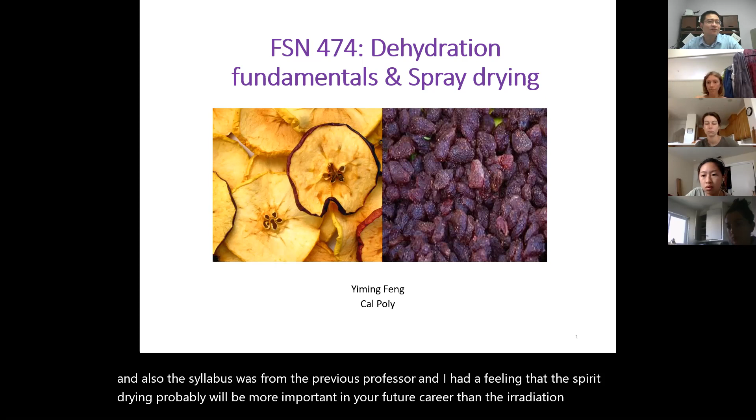So for this class, if you look at the previous syllabus, it was irradiation, but later on I decided to replace it with spray drying with some dehydration fundamentals, because we will have a spray drying experiment in 2 weeks, and there was no lecture covering that topic. Also, the syllabus was from the previous professor, and I had a feeling that spray drying probably will be more important in your future career than irradiation, because a lot of nutraceuticals, vitamins, and food ingredients are actually produced by spray drying quite a lot. For irradiation, it's very less likely that you will have to deal with it, so I think compared to spray drying it's less important. That's why I decided to talk about spray drying today, and I'll squeeze irradiation with microwave into the next lecture.

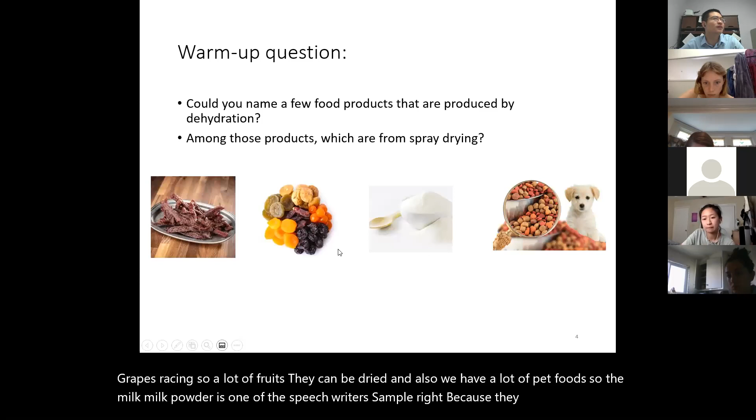So I also listed a few examples here, like beef jerkies, and dried fruits like apples, grapes, raisins - a lot of fruits can be dried. And we also have a lot of pet foods. Milk powder is one of the spray dried samples, because they form a powder structure. So quite a lot of food products in the market right now are produced by drying.

Okay, so this is a review. I assume you guys have learned all of this in 204 and 330, so this is just a review to recall memory. I'll go a little bit fast here, so if you want me to slow down, or if any part hasn't been covered in previous courses, I'll stop and explain a bit.

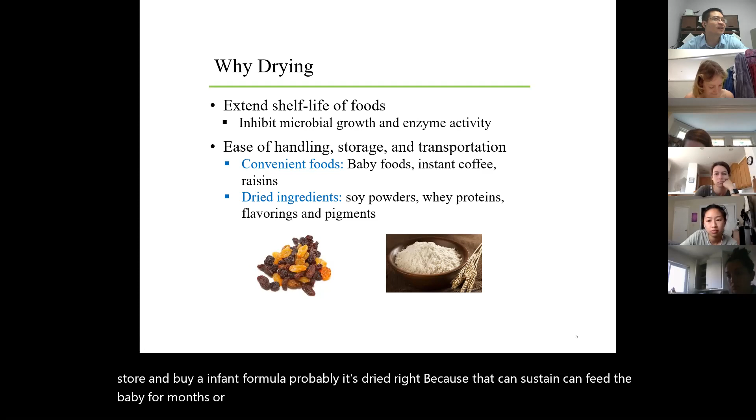So the reason we want to dry our food product is to extend the shelf life, right? Because from the standpoint of handling, storage, and transportation, dried food is more convenient to transport. For example, if you go to the grocery store and buy infant formula, probably it's dried, because that can feed the baby for months or even longer. But if you buy liquid infant formula, that probably can only last for a week or so. So dried foods definitely help us transport food products more conveniently.

And also, a lot of ingredients are dried. For example, a lot of flavor ingredients like spices are dried because we use them in small amounts, and also because if they are not dried, they probably cannot last for a long time. So those are a lot of the reasons we want to dry food ingredients or food products.

So probably you guys are very familiar with this curve, right? This curve keeps popping out again. Basically, water activity is the key factor that influences all those chemical reactions like lipid oxidation, non-enzymatic browning, hydrolytic reactions - enzymatic or sometimes chemical hydrolysis - and also enzymatic activity and microbial growth.

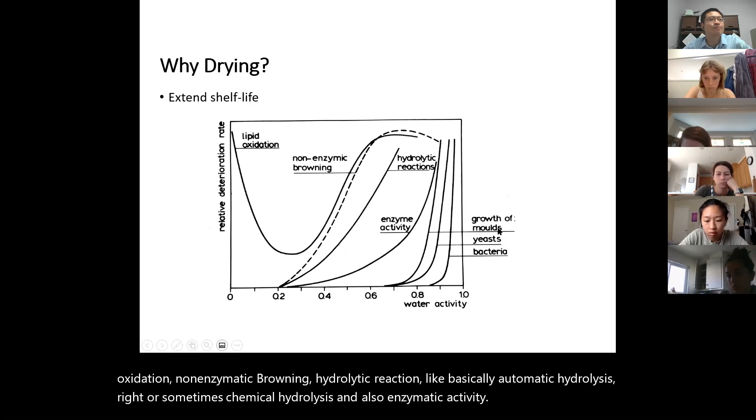When I was studying food chemistry, one of the questions I always get asked is, if we dry food, why do we keep it around 0.2 water activity? If we go to 0, then lipid oxidation is going to be very rapid, right? I don't know if you guys still remember why lipid oxidation speeds up at low water activity - just a small quiz for the chemistry class.

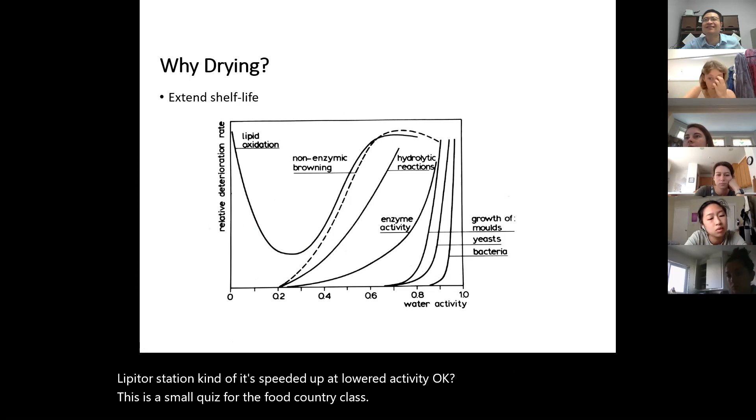You guys remember? Okay, all right. So, can you repeat your question?

If you look at this chart, you can see that most reactions will speed up while the water activity goes to a higher level. For example, microbial growth will start around 0.8, and it speeds up as water activity gets close to 1. Enzymatic activity also gets faster with higher water activity, and so does the browning process. But if you look at lipid oxidation, the fastest rate is actually found when water activity is close to zero.

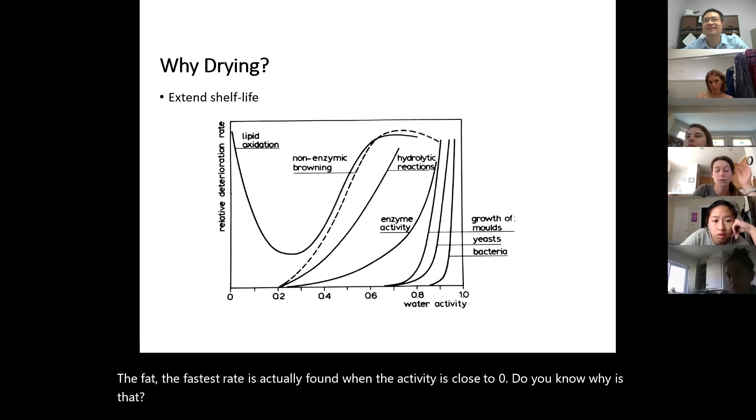Do you know why? Is it because the air will get to the lipids and oxidize it if there's no water to prevent that? I don't know, that's a good guess. Any other thoughts?

Have you guys seen this curve, this chart, from food chemistry class or other classes? Yes. Okay, let me explain, because I assume this chart keeps popping up telling you the relationship between food stability and water activity. It's quite important for food science students. This chart kind of summarizes and integrates all the knowledge you've learned in the past 4 years.

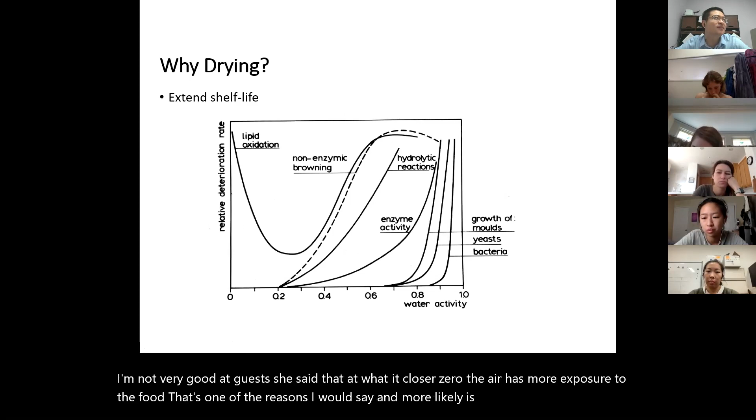So Abby gave a very good guess - she said that when water activity is close to zero, the air has more exposure to the food. That's one of the reasons, I would say. More likely is that lipid oxidation is accelerated here because it's a highly catalyst-driven reaction. When we have very low water activity, the concentration of catalyst actually reaches an extremely high level. For example, a lot of metals or transition metals play as catalysts during this process. Basically, if we think about lipid oxidation, it will generate a free radical.

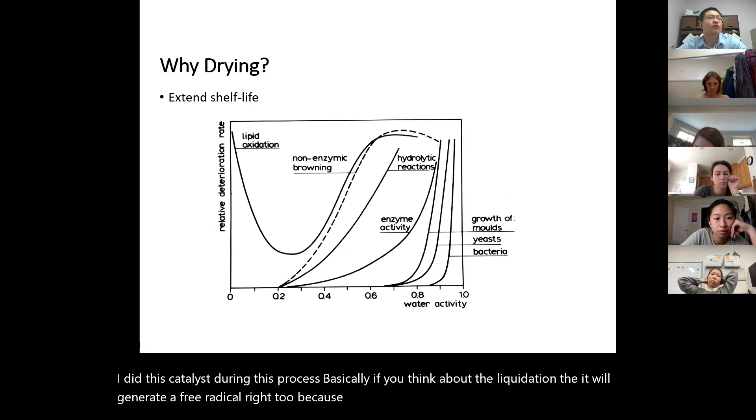If you still recall, it's a chain reaction. That's why free radicals can be easily created when we have less water, and without any water, those catalysts can easily accelerate this reaction.

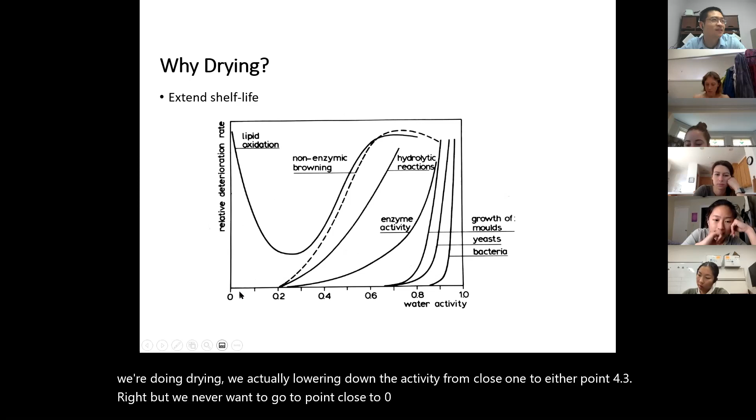If I want to go too deep, this could be a whole class topic. But in our class, I want to explain a little about this: when we are doing drying, we're actually lowering the water activity from close to 1 to either 0.4 or 0.3. But we never want to go close to zero, because if we dry it too much, we will accelerate the lipid oxidation process to an extremely dangerous level. That's part of the reason I wanted to ask this question - when drying, it's not like the drier the better. We have to stop somewhere to inhibit the lipid oxidation process, otherwise rancidity will build up very quickly.

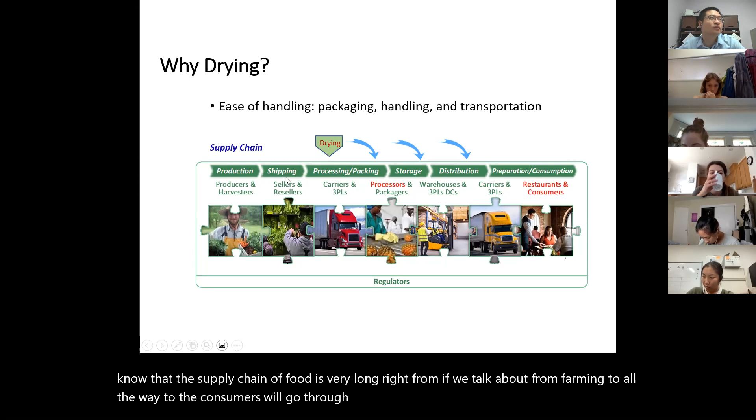For the reasons of drying, we've talked about a lot because we know the supply chain of food is very long. From farming all the way to consumers, it goes through production, shipping, processing, packaging, storage, distribution, and consumption. Drying can be involved in every single stage of this process. For example, from packaging to storage, if we apply drying, we can easily reduce the cost during the supply chain of food ingredients or products. So it's mostly for economic reasons.

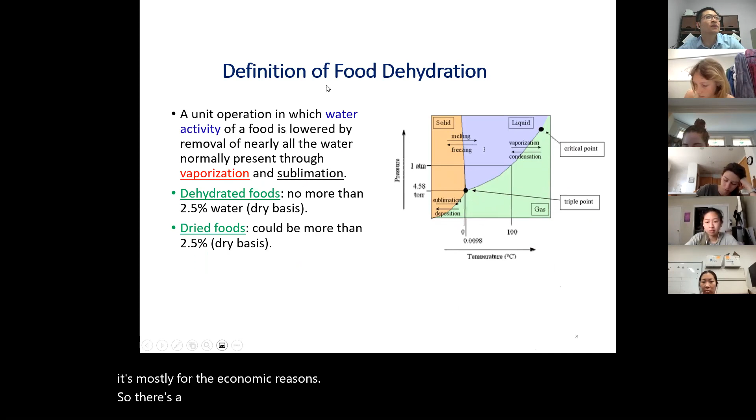So there's a quick definition about food dehydration, assuming you guys learned it before. Basically, it's a unit operation that removes water. One thing I want to mention is the difference between dehydrated foods and dried foods. If the water content is lower than 2.5%, we call it dehydrated food, and this water content is based on dry basis. You guys still remember what is dry basis?

If you don't recall, I can explain a little more. I saw some of you nodding heads. So dehydrated foods have less than 2.5% water, and for dried foods, we have more than 2.5% water. So the definition and regulation of dehydrated foods is a little more restricted compared to dried foods.

There are two ways of doing that: vaporization and sublimation. Vaporization is where we heat it up to remove water, and sublimation is where we directly convert water from ice to vapor at very low temperature.

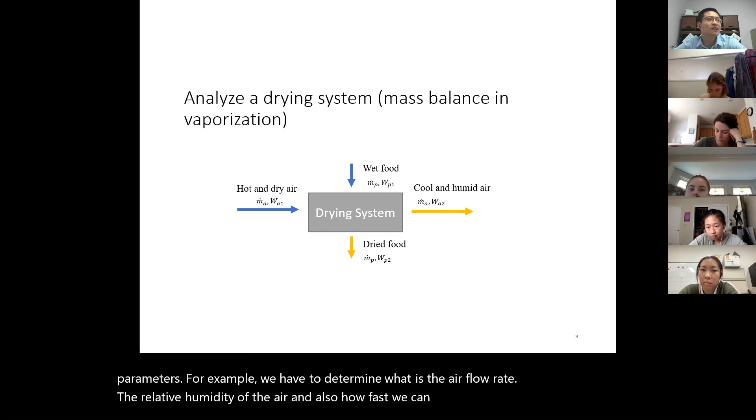The reason we do that is because in spray drying we have to determine a lot of processing parameters, for example the airflow rate, the relative humidity of the air, and how fast we can feed our food product into the spray drying system. All of that is basically a very conventional drying process, so it's connected to air drying.

So that's kind of a recall of those old concepts. Now we'll be trying to analyze a spray drying system.

Basically in a drying system we have two inputs. We have the wet food input, which can be milk or coffee or sometimes soy milk, and on the other hand we have another input that will be hot and dry air.

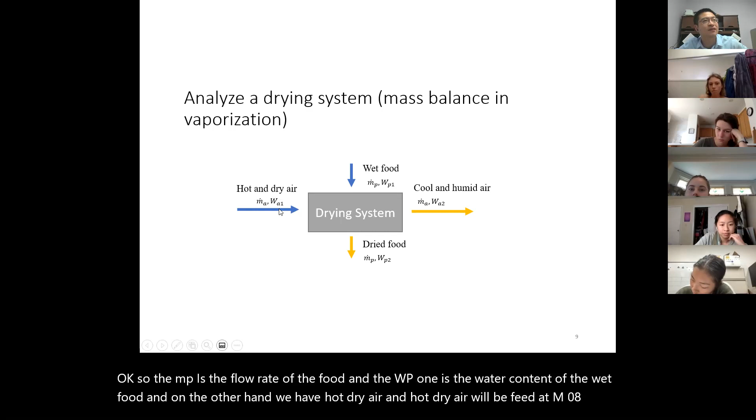The m dot p is the flow rate of the food, and WP1 is the water content of the wet food. On the other hand, we have hot dry air fed at ma dot, which is the airflow rate, and WA1 is the water content in the dry air. So after drying, we have two outputs.

The air will be cooled down and become humid, and the food will be dried, and the water content will be dropping.

Because analyzing this system requires refreshing a bit about the psychrometric chart, especially to determine air properties like absolute humidity and other values, I want to very briefly go through this psychrometric chart just to refresh your mind. I think many of you have learned about this in 330 and 400.

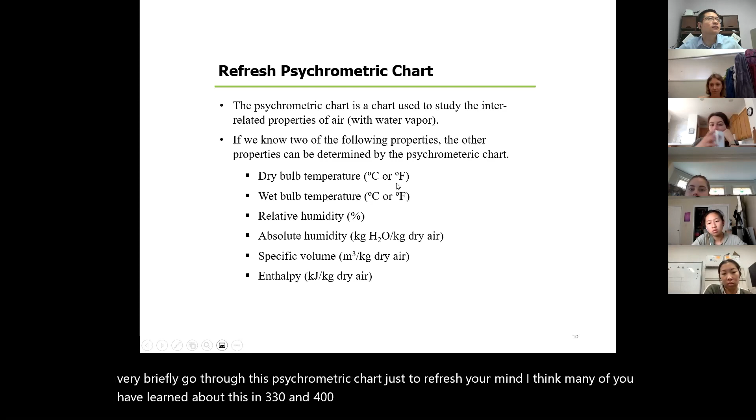The psychrometric chart is used to study the interrelated properties of air. We have six parameters: dry bulb temperature, wet bulb temperature, relative humidity, absolute humidity, specific volume which is the inverse of density, and also the enthalpy.

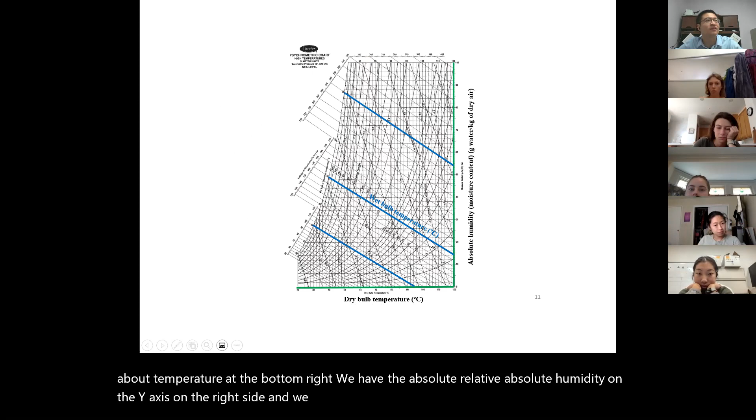For example, if we have this very busy psychrometric chart, we have dry bulb temperature at the bottom, absolute humidity on the y-axis on the right side, wet bulb temperature, and also relative humidity on those curves. Those other curves are specific volume, and on this side we have the enthalpy.

For example, let's solve this: if the smokehouse has a wet bulb temperature of 45 degrees C and dry bulb temperature of 51 degrees C, based on those two parameters we can determine the rest of them. I know you guys have done a lot of those conversions in the past, so I'm just refreshing for those who might have forgotten since it's been a long time.

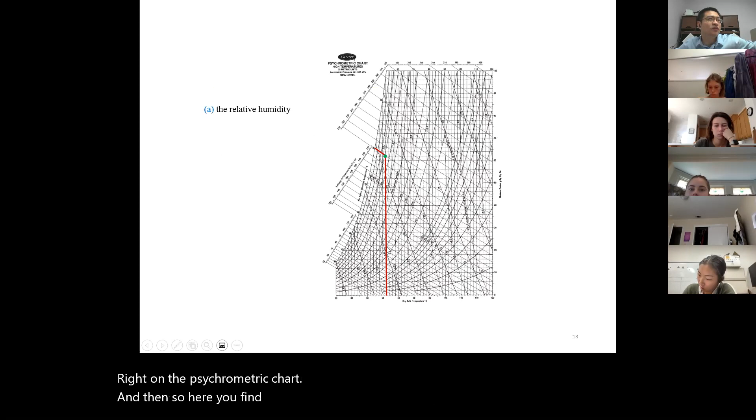So with 45 degrees C and 51 degrees C, we can locate them on the psychrometric chart. You find the dry bulb temperature on the bottom, and on the left side you find the wet bulb temperature. Then you extend the line and find the intersection, and those curves show the relative humidity. Based on that, by approximation, we can find the relative humidity.

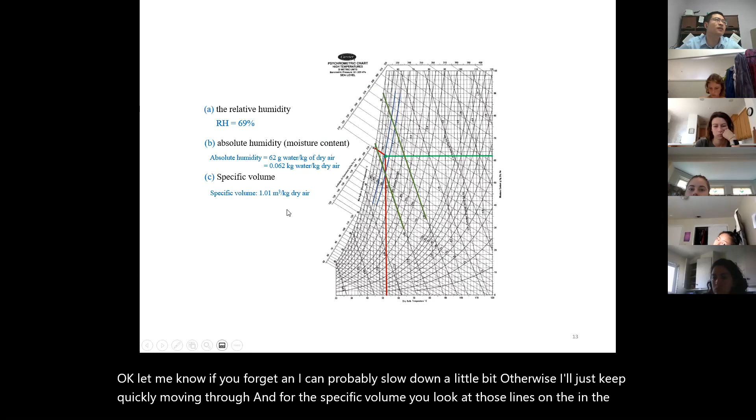If you want absolute humidity, you can draw a line to the right side and locate that number. Let me know if you forget, and I can slow down a little bit, otherwise I'll keep quickly moving through. For specific volume, you look at those lines in green, and that's also some approximation.

In a lot of cases, for example if you're working in the pilot plant, it's less likely that you'll bring a psychrometric chart all the time. So if you're asked to solve a technical question quickly, needing to find a psychrometric chart isn't realistic. There are actually a lot of online psychrometric chart toolboxes which let you get all those values in one second. For example, here I posted one link to the psychrometric toolbox.

Let me pull it out here. So for example, if you type in 45 degrees C for the wet bulb temperature and 51 for the dry bulb temperature, and just click calculate, you get all the values you needed in one second, very accurately. This is one way I'd recommend, especially if you're familiar with this chart, since it's easier to get all those values in real life.

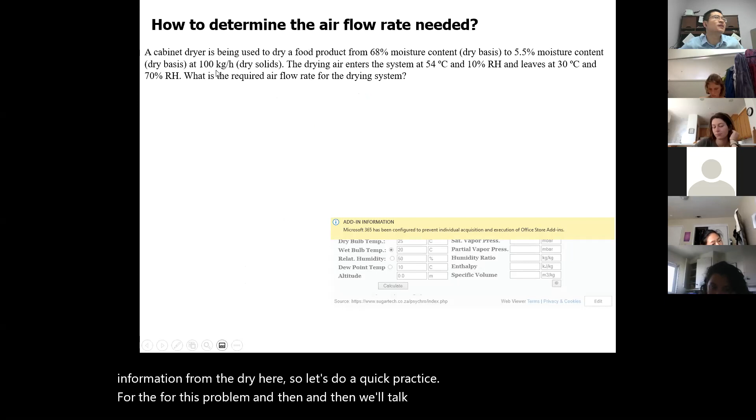So basically, we have a cabinet dryer used to dry a food product from 68% moisture content dry basis to 5.5% moisture content dry basis, at 100 kilogram per hour. The drying air enters the system at 54 degrees C and 10% relative humidity, and leaves at 30 degrees C and 70% relative humidity. The question is: what is the airflow rate that we need to supply this drying system?

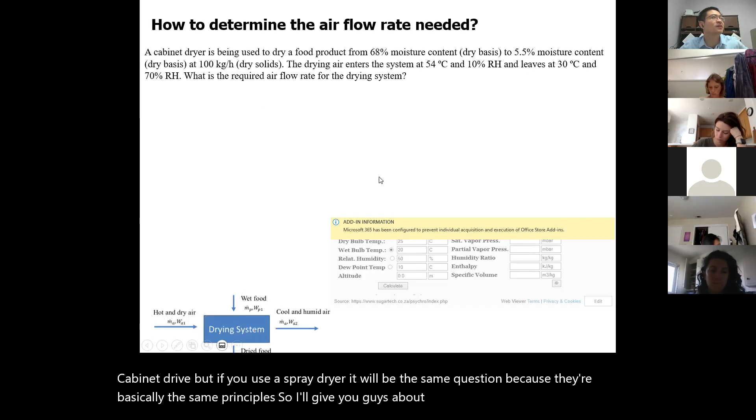So here I use the cabinet dryer, but if you use a spray dryer, it will be the same question, because they're basically the same principles. I'll give you guys about 2 minutes to think about this, and then let's talk about how to approach this question and share the answers.

Okay, so I'm giving you all the variables here. It might be easier for you to think about it.

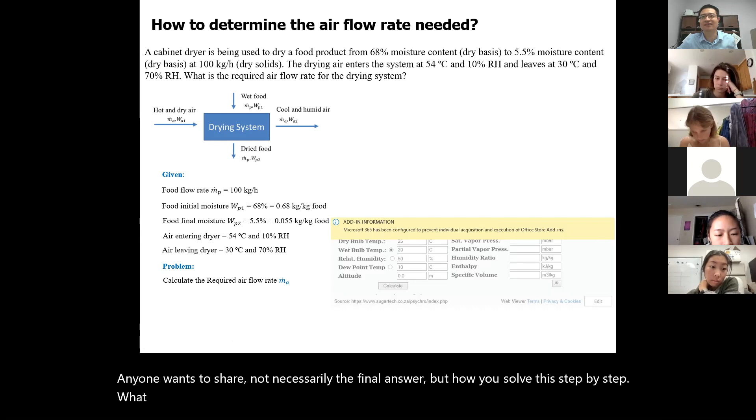I mean, first, we have to make a mass balance - what goes in must come out. And then for the air, do you use the relative humidity or do you use the absolute humidity?

Any thoughts here? Okay. Was this covered in 444 and 330? It was covered? Okay, okay.

So probably I will list this because the reason I want to refresh this part is that when I talk about the next few slides about the details of spray drying fundamentals, especially for the spray drying system, it's so delicate that our airflow rate is the key point. The airflow and air properties of our input air - sometimes we need to add a dehumidifier, sometimes we need to heat up to extremely high temperature.

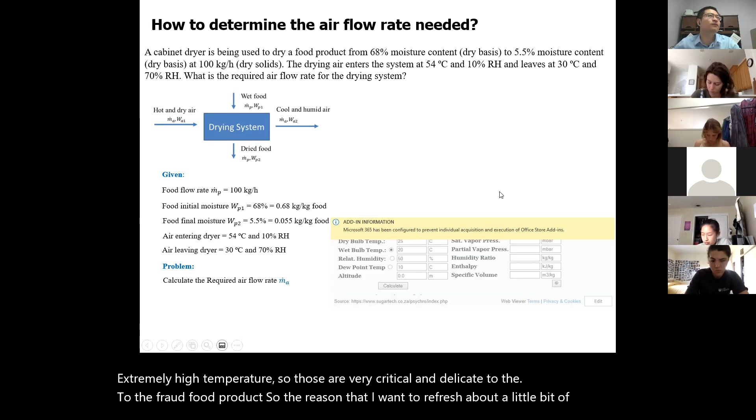Those are very critical and delicate to the product. The reason I want to refresh the calculation is that if we don't supply enough air, or if the air is not dry enough, our final product will be caking and aggregate. For example, if you receive a milk powder that is aggregated - it's made for instant dissolution, and if the spray drying process is not complete, or it's too dried, either way will cause a lot of issues.

So processing control and parameter optimization is one of the key factors when we're designing a spray drying system. That's why I'm bringing back all this stuff - just to help you refresh your mind, especially on how to use psychrometric information to solve this problem.

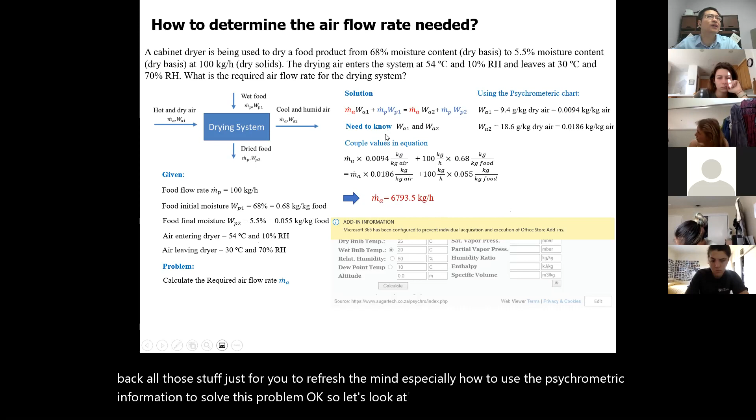Okay, so let's look at the solution together. The first step, as I always do, is to write down the governing equation. Basically, it's a very simple mass balance equation, right? We have a lot of knowns and some unknowns.

If we look at this equation, we have the water that comes in - if you multiply those, water coming in equals water going out. So what we know is all those values, but what we don't know is MA, which is the dry hot air flow rate. For the rest of them, we basically know.

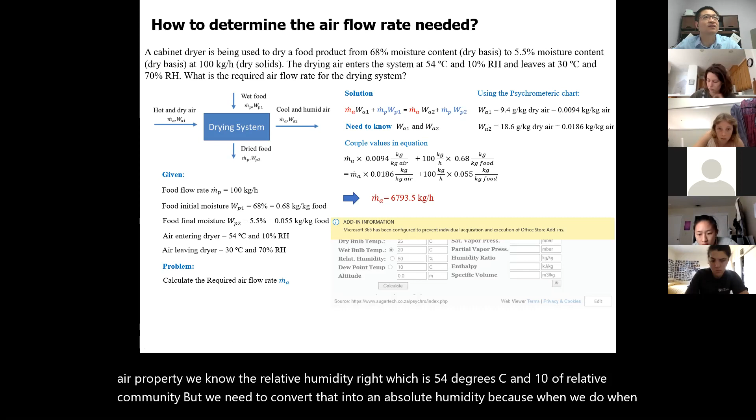But one thing we need to convert is that for the air property, we know the relative humidity - 54 degrees C and 10% relative humidity. But we need to convert that into absolute humidity, because when we're working on mass balance, everything is mass based, and absolute humidity is a mass-based value.

So once we convert the air in - the relative humidity - into absolute humidity, we get 0.0094 kilogram per kilogram air. You guys can use the link I posted in the last slide to very quickly get that number. Once we get those absolute humidity numbers, we can plug them in, and the only unknown variable here is the airflow rate.

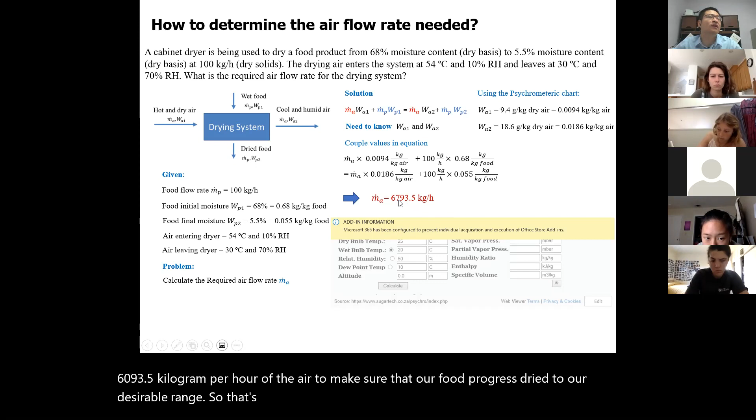And then we can solve this airflow rate that is required. So here you can see we need at least 6,793.5 kilogram per hour of the air to make sure that our food product is dried to our desirable range.

That's the very basic way of solving the required airflow rate problem. So do you guys have any questions about the procedures to find the airflow rate required? Let me know if I move too fast, because I'm not quite sure how well you still remember everything here. Any questions? Or give me maybe a smile face if you are okay with this part.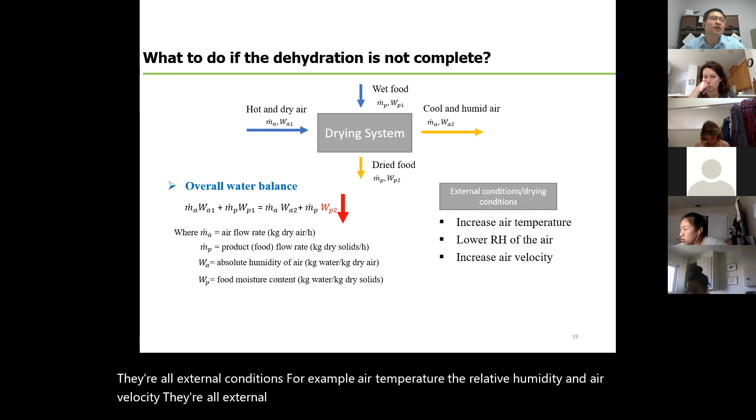Okay, great, great. All right, so I will skip this problem. Basically, I think you guys are pretty clear about how the air interacts with foods and how all the mass balance happens. So today I will probably focus more on the food property and the dynamics of the water loss during the drying process. Everything we talked about before are all external conditions, for example air temperature, relative humidity, and air velocity. They're all external factors that we use in controlling the system. But on the other hand, we also have quite a lot of internal factors, for example the food property, the intrinsic properties of food. So this is something we want to talk about today.

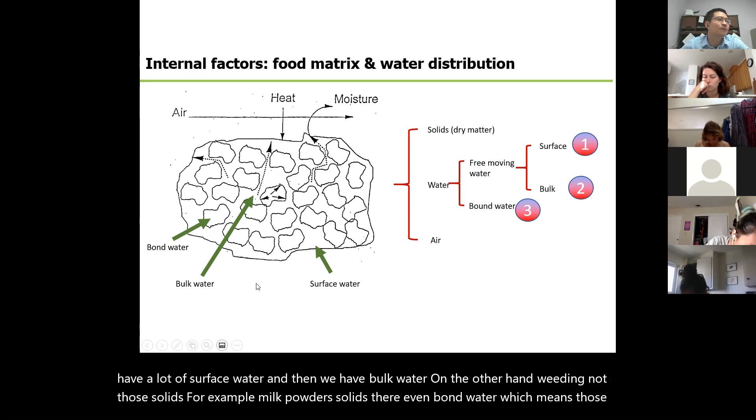So in the food matrix, for example like milk powders or dried cheese powders, we have different components. First of all, we have a lot of surface water, and then we have bulk water. Within those solids, for example milk powder solids, there's even bound water, which means that water is very highly bonded to the food molecule, and we can hardly remove it during dehydration. And of course we also have some air bubbles.

So my question is, among those water types, which one do you think will affect the water activity here? If we talk about a food with high water activity, do you think we have a lot of surface water, or a lot of free moving water, or the amount of total water? Free moving water. Good, Julia. So the free moving water determines how much our water activity goes, basically how active the water can move within the food matrix. Good job.

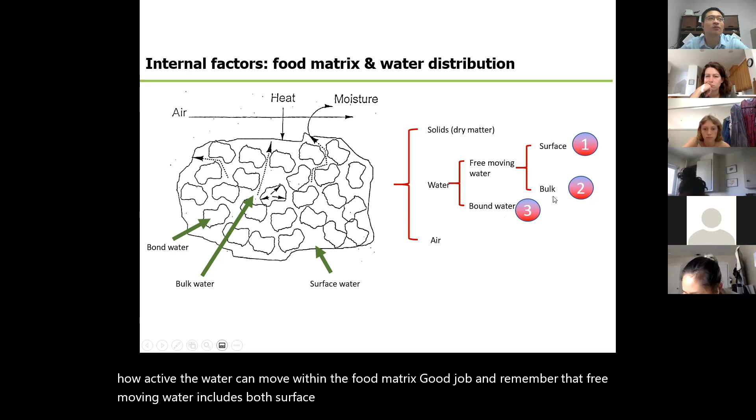And remember that free moving water includes both surface water and bulk water. So if we think about a drying process, we're actually reducing the water from a very high level to almost nothing. So if we plot a moisture content curve against time, we'll have three stages during the decline of the water content. At the very beginning we have kind of a lagging time, and then we will have a linear dropping curve, and then finally the decline of the water content will slow down. So we basically have three stages. Have you guys learned about this before?

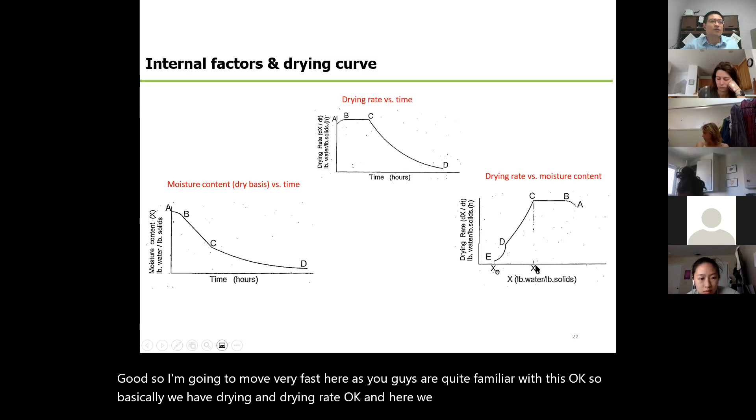Okay, great, good. So I'm going to move very fast here as you guys are quite familiar with this. Basically we have drying and drying rate, and here we have critical moisture content. So we need to convert the drying curve from moisture versus time to the drying rate versus the dry base moisture content.

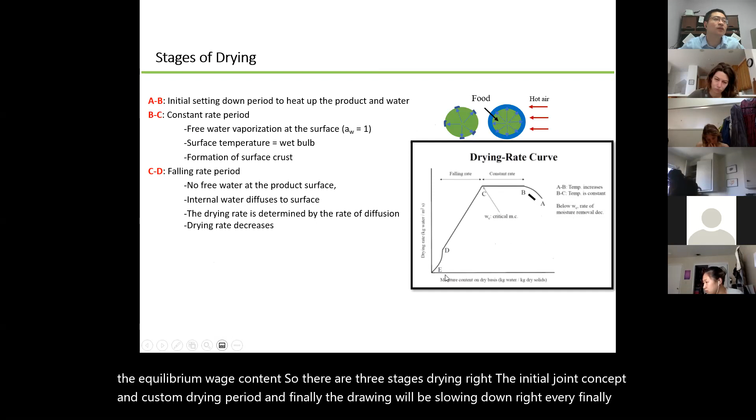So basically it is the water versus the solid content, X value. By looking at this curve, we can get the critical moisture content and the equilibrium moisture content. So there are three stages of drying: the initial setting down period, and then the constant drying period, and finally the drying will slow down, to the falling rate drying period. So three stages, okay.

And afterwards, we have the second falling drying rate. Basically we're trying very hard to remove the bound water, but typically we cannot remove all the bound water. So when we're talking about spray drying, typically the second falling rate period will not happen. We typically stop somewhere close to the falling rate period. All right, so these are two critical values. I assume you guys have learned about it before.

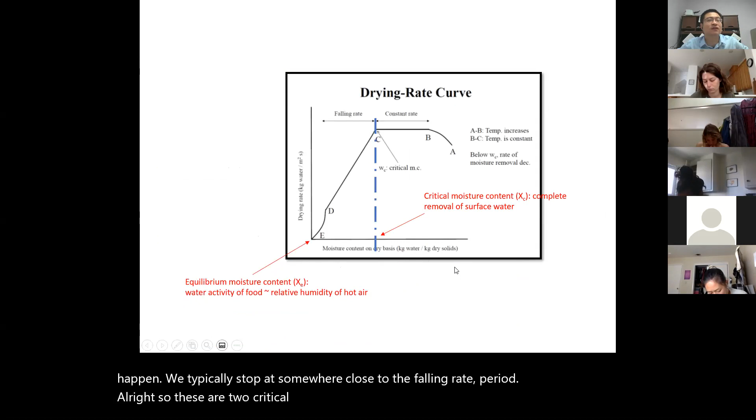Okay, so I'm going to skip everything here, and let me skip to the spray drying.

Okay, so this is slide number 41. We'll start from here.

So if we talk about drying, there are a lot of drying technologies. If you're not familiar, you can go back to my previous slides comparing all the drying processes and how the products compare to each other. Let me talk about the technology of drying that has evolved in the past few years. At the very beginning, drying was actually hot air drying. For example, hundreds of years ago, people used hot air drying or sun drying to dry their foods to extend the shelf life.

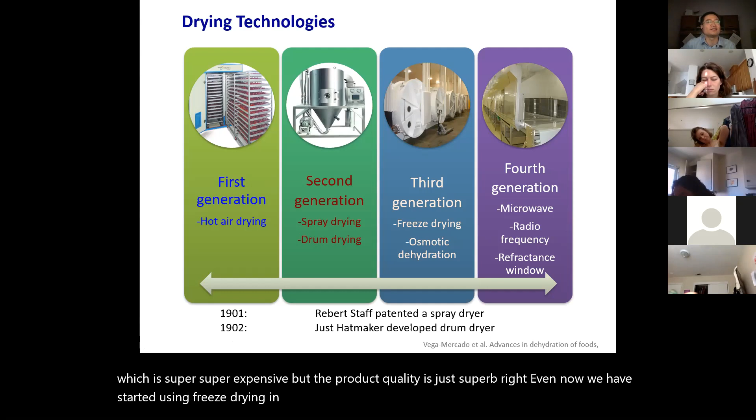Now we're using a lot of fourth generation technology. The fourth generation applies electromagnetic waves, for example microwave, which we'll talk about next class, and radio frequency, and sometimes the refractance window. Basically it's a very short period of electromagnetic wave treatment. So the fourth generation is basically combining different technologies together to accelerate the drying process.

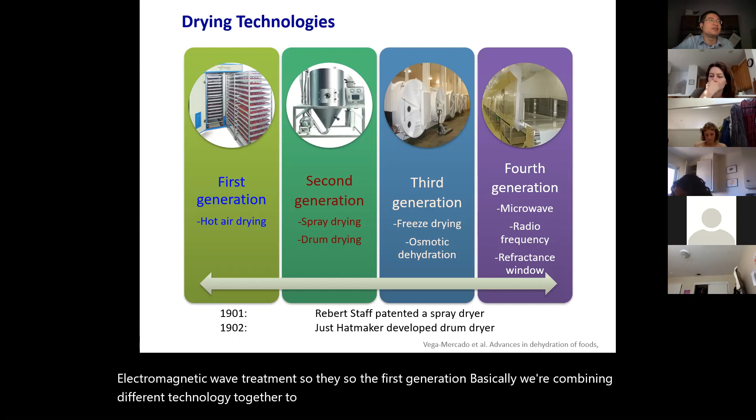If you think about hot air drying, it might take hours or days to reach low water activity. But in the second generation, the drying can be shortened to a few seconds. For example, spray drying can do everything within 10 seconds. But the problem is that we can only process powder products - that's a limitation. So to overcome that, we developed other technology to treat bulk food products, and they can still be dried very fast.

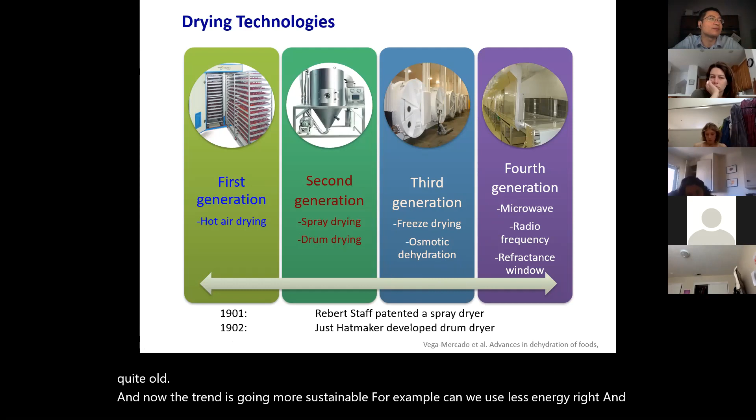Those are all reasons we are still advancing our drying technology, although it's a quite old processing method. Now the trend is going more sustainable - for example, can we use less energy? How can we apply those drying technologies to countries that lack gas or steam supply, or how can we dry food in a home-based setup within a very short period of time? Those are the modernization of drying technology. It's still evolving, and we still see a lot of companies investing in this area.

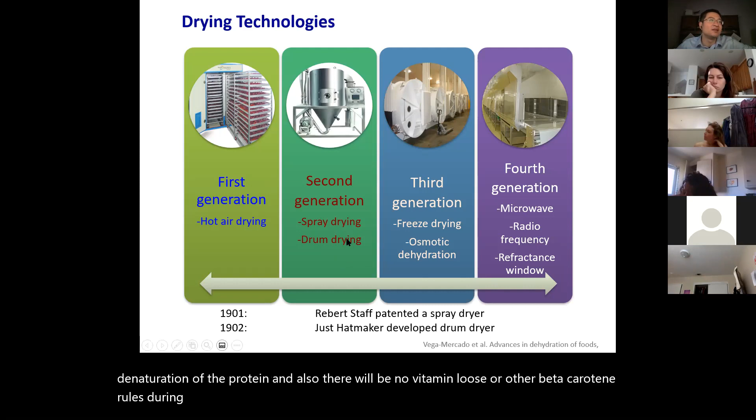One thing that I noticed is that one company spent 5 years to develop a room temperature spray dryer. Basically no heating is required, but milk powder can be dried at room temperature by spray drying. In that case, we have no heat denaturation of the protein, and also no vitamin loss or beta carotene loss during the spray drying process. That company was acquired by ADM, I think it was last year, for hundreds of millions of dollars, because they spent many years developing this technology. So you can see this area is still evolving very actively, because drying is still playing such an important role in our daily life.

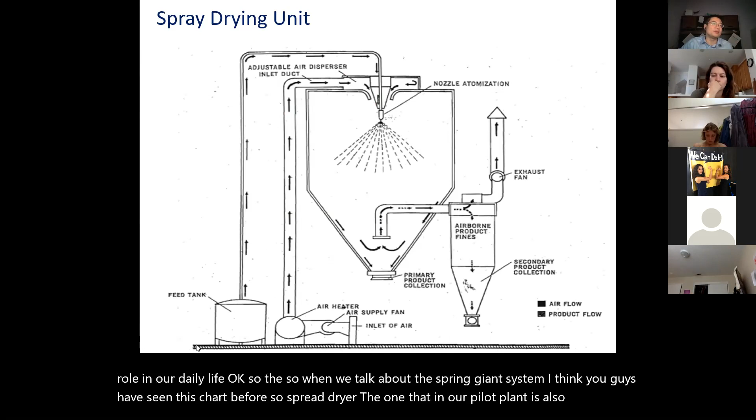Okay, so when we talk about the spray drying system, I think you guys have seen this chart before. A spray dryer, the one in our pilot plant, is also very similar to this one. Basically we have a feeding tank, and then we have a pump that will transport our food product to the top, and they will spray through a nozzle atomization.

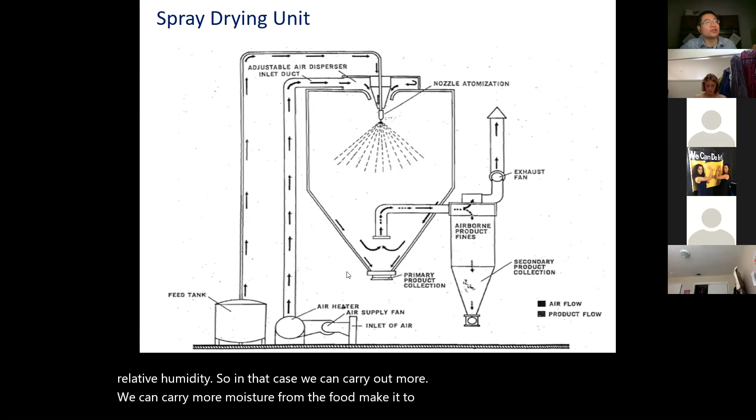In the meanwhile, we have air to dry the food, so the air will be heated up. The reason you guys have seen the psychrometric chart is that heated air has lower relative humidity. In that case, we can carry more moisture from the food, making sure the food is more dried. So that's why we need to heat up the air.

The air and the food product will be mixed at the top, and then the food product will be dried, and then we have a cyclone to separate the air and the food product. Basically this is a condensing part. You will see the air cycling around in this collector, and those powders, because the density is a little bit higher, will settle down to the bottom, and the air will be exhausted through this fan.

So this is a kind of separator. If we don't use this separator, the air will take out a lot of powders, and we'll lose a lot of products. The one in our pilot plant is very similar to this one - you'll see it in about 2 weeks.

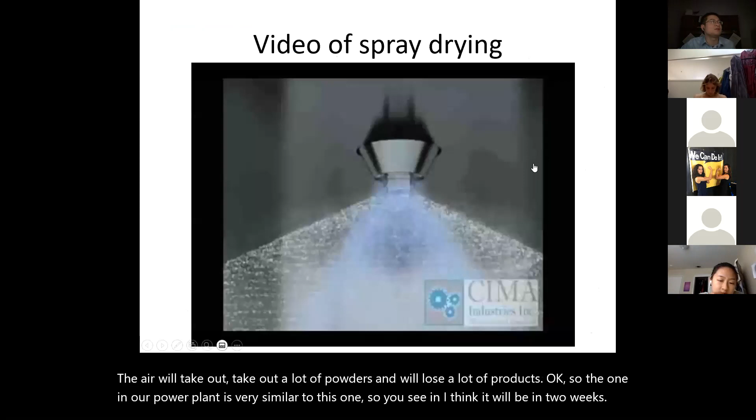So here's a video I want to share with you about how a typical spray dryer works.

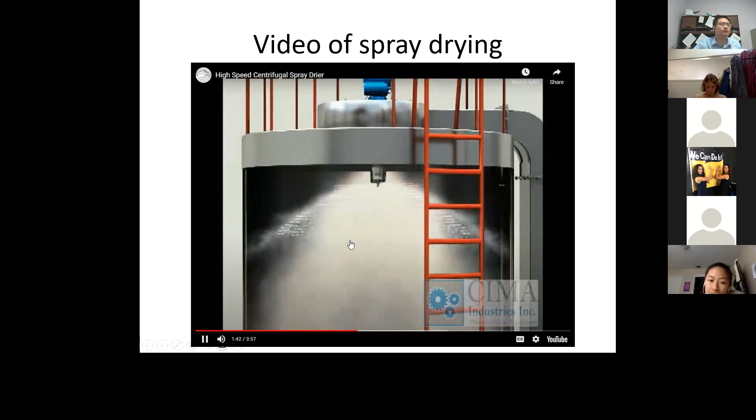Features and applications: 1. Fast drying speed. The surface area is increased greatly when the liquid is atomized, and the water should be evaporated instantly in the hot air. 2. Applicable for drying heat-sensitive material.

The beads flow in the same direction with the hot air. The air with high temperature contacts only the beads, and then the temperature drops down very fast. The dry products contact only the low temperature air. So the process is applicable for heat-sensitive material.

3. The application range is wide. It might work as hot air drying or cool air congelation according to the property of material. The most common applications include drying of milk, fruit juice, dyestuff, pigment, pesticide, byproducts in slaughterhouse, blood and blood products,

detergent, surface active agent, fertilizer, and instant food, etc. 4. The drying process is finished very fast. The product keeps bead-like, and the flowability and solubility is good.

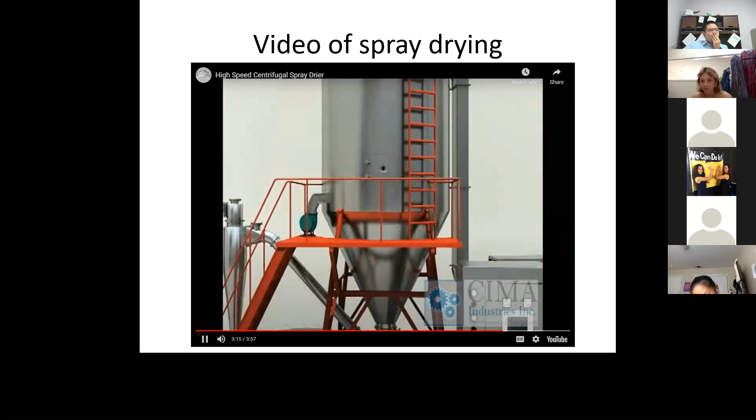5. The process is simple and the operation is easy. It is normally applicable for liquid with moisture content of 40 to 80%, and for some special material, it can be dried into powder directly with moisture content up to 90%. Screening and grinding processes are normally not required for this process, so the process is simple. The size of product, bulk density and final moisture content might be adjusted within a range.

6. All parts that contain materials are constructed of stainless steel, to avoid pollution of product. 7. Siemens PLC and human-machine interface for the operation system. Fully automatic operation might be supplied on request.

Okay, so this is a very typical drying system that you'll find in a lot of production lines. If we break it down, you'll see that we have a drying tank, the drying chamber. Basically, the air and the food will mix in this giant chamber. In our case, it's not that big, but it's quite large.

So the cleaning sometimes will take some time, because if we were producing milk powder, that milk powder kind of sticks on the walls, so it's quite difficult for us to remove.

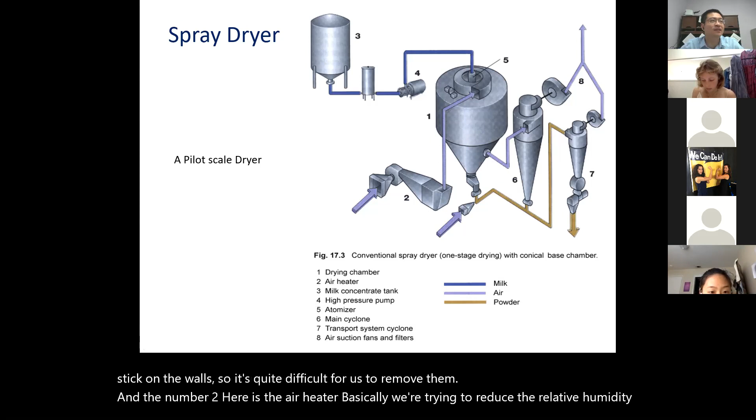And number 2 here is the air heater. Basically, we're trying to reduce the relative humidity of the air by heating it up. Sometimes if it's a bad day that the air is too humid, or it's a rainy day, we have to connect it with an air dehumidifier, because otherwise, if we keep supplying humid air into the chamber, then our product can

be hardly dried. In a lot of cases, for example, in San Luis Obispo, the humidity in the air varies quite a lot. We have very dry days and sometimes very humid days. So if we don't have a dehumidifier, we'll get quite different results day by day in the daily production, because, as you do all the calculation, the extent of the drying pretty much depends on the air properties that we are supplying.

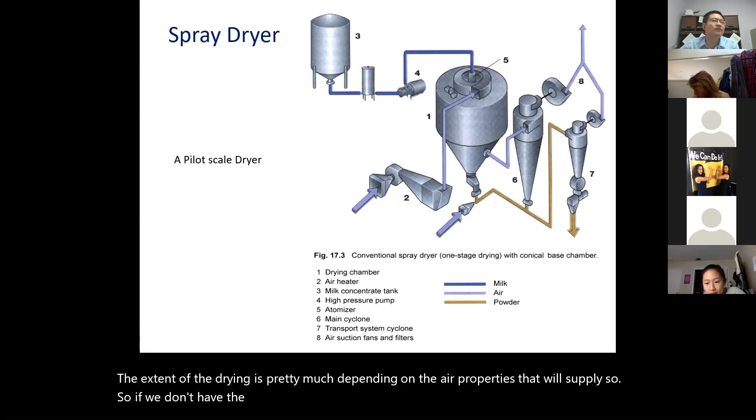So if we don't have a dehumidifier, we have to make a daily adjustment on those parameters to make sure that our food product meets the same quality from each day's production, right? So that's the air heater.

And number 3 is a milk concentrate tank, basically this feeding tank, right? So every time we talk about spray drying, we need to pre-concentrate our milk, because spray drying can only deal with concentrated milk products. If it's too dilute, then the drying process will not be able to remove all the water to produce powder.

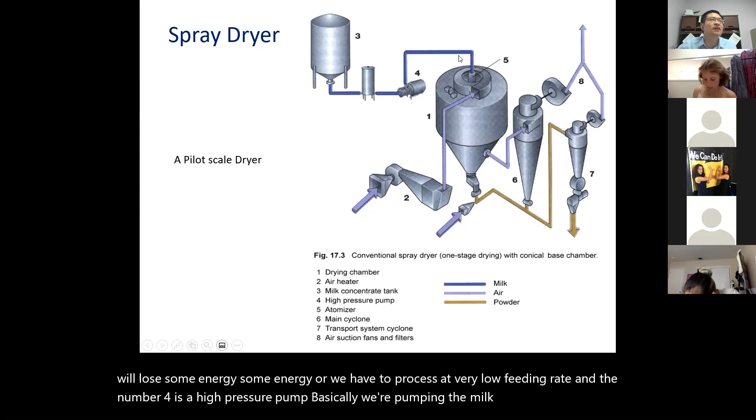So that will kind of waste some energy, or we have to process at a very low feeding rate. Number 4 is a high pressure pump, basically we're pumping the milk from the tank into the drying chamber. And number 5 is the atomizer. In the atomizer, basically we're spraying the milk into the drying chamber, right?

And sometimes we connect the atomizer with high pressure nitrogen, because, for example, if we process something like milk or the egg you guys mentioned before, it's quite viscous. So during the process, it's very likely that our product will clog the channel. So in that case, the process will be shut down.

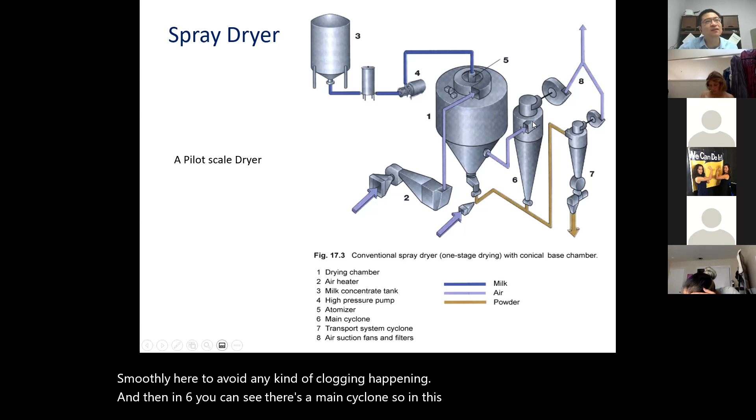So in a lot of cases we use high pressure air or nitrogen, just to keep the liquid flow smoothly and avoid any kind of clogging. And in number 6, you can see there's a main cyclone, where we separate the powder and the air. The air will go out from number 8, where we have the air suction, which is basically a vacuum and a filter.

If we don't have a filter, then probably we're contaminating the air with those powders, and that can be quite dangerous. If the powder accumulates in the air, it can cause an explosion, and it also damages humans' respiration system, right? So this is the air filter in number 8.

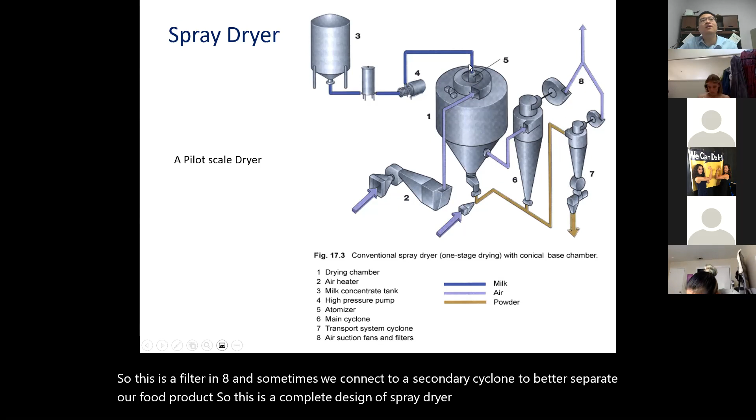And sometimes we connect it to a secondary cyclone to better separate our food product. So this is a complete design of a spray dryer. In our pilot plant, we have a very similar design to this one, but our feeding tank is connected directly to the spray dryer, so it's not far from there.

But in a production plant, because the tank is huge, there's no way that we can attach the tank to the main chamber. So sometimes we need a long pipe to transport it.

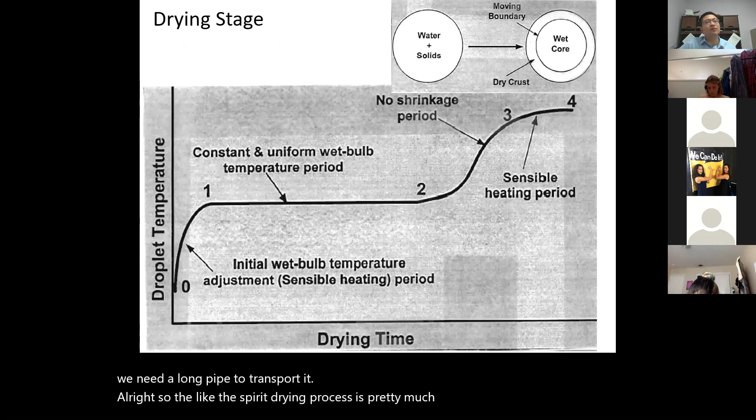All right, so the spray drying process is pretty much like the typical drying process we talked about, and it has 3 or 4 stages. The first step for spray drying is that the temperature on the surface of the powder will increase to reach equilibrium temperature. Basically, the temperature will increase to a certain level where evaporation can start occurring. So 0 to 1 is the temperature rise, and 1 to 2...

So this curve is temperature versus drying time. It's not doing anything with the dropping of the moisture content. From 1 to 2 in spray drying, there's a constant temperature range. Basically, the moisture from the surface will be evaporated, and the moisture from inside will be moving to the surface, which is why you see the temperature staying constant. That's because all the latent heat is absorbing all the energy from the air, causing minimal increase of temperature to the droplet.

Once all the surface water has been removed, the drying rate decreases, which means our latent heat is not absorbing enough heat. That's why the droplet has to increase temperature to compensate for that part of energy, and then you'll see the temperature increase.

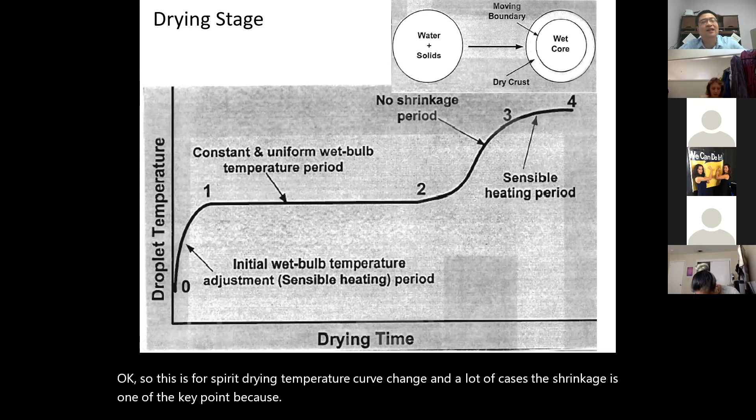Especially with water—when the water content is high, the glass transition temperature is pretty low, which means it can deform easily at a low temperature. In that case, we'll have particles being highly wrinkled instead of spherical. So if we take a microstructure image of those wrinkled particles, you'll see that none of them look like a perfect sphere, but they all have kind of defects on the surface. That's all happening during the shrinkage period.

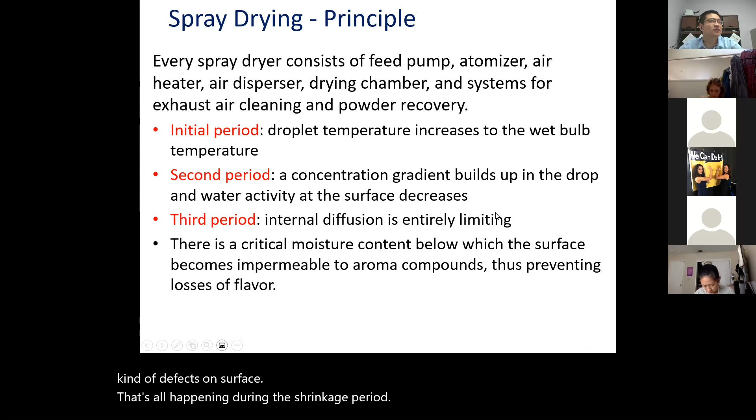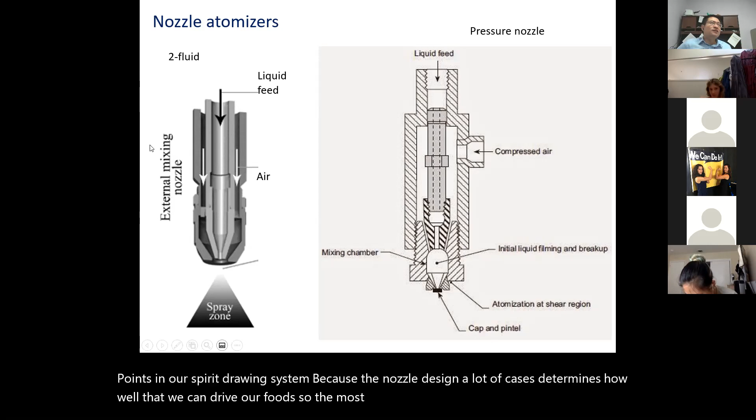Nozzle design is one of the key points in our spray drying system because, in a lot of cases, it determines how well we can dry our foods. The most common nozzle you can see here is the two-fluid nozzle. Two-fluid nozzle means we have 2 types of channels: the first channel is the liquid feed, and on the outside we have the air channel surrounding the liquid feed, so that they can mix well to expose the liquid to the air in a maximal way.

And sometimes we even introduce compressed air, which helps increase the air pressure so that clogging is less likely to happen. So if you sometimes hear a noise from the pressurized air, that means the system is more resilient against those clogging problems.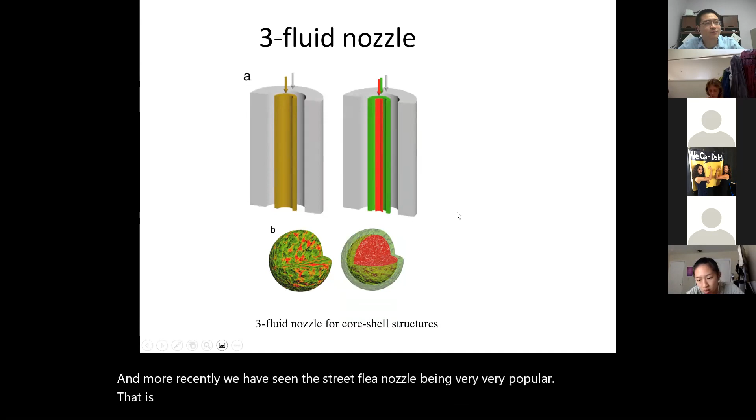And more recently, we have seen the three-fluid nozzle being very, very popular. That is because, I don't know if you guys learned about microencapsulation.

A lot of companies in food ingredients now produce them in an encapsulated way. For example, with vitamins, you typically don't want them to be pure vitamin, because they can be destroyed during the gastrointestinal period. If we consume a vitamin just as an oil droplet, when it passes through the gastric phase, the low pH can lower the bioavailability of those food ingredients.

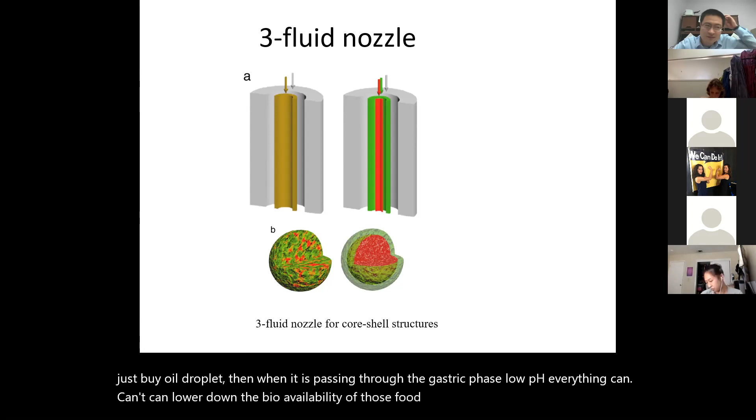So for those vitamins, we want them to release a little bit slower, and we want something to protect them. That's why sometimes we need a three-fluid nozzle for the purpose of creating a core-shell structure. This is something the food ingredient giants are heavily investing in.

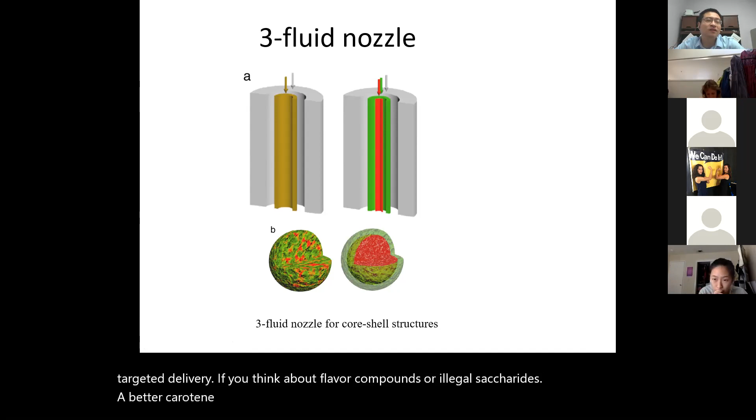I was also working on one of their three-fluid nozzle projects to produce oligosaccharides, basically for targeted delivery. If you think about flavor compounds, oligosaccharides, and beta carotene, they need to be delivered into different parts of our human body. For example, flavor compounds need a very rapid release into the mouth within 10 seconds after consumption.

Otherwise, if you swallow it, the flavor compounds no longer take effect. However, for oligosaccharides, we need to deliver them all the way to the colon because they feed the gut microbiota, as a prebiotic. And for some vitamins, we are trying to deliver them to the small intestine.

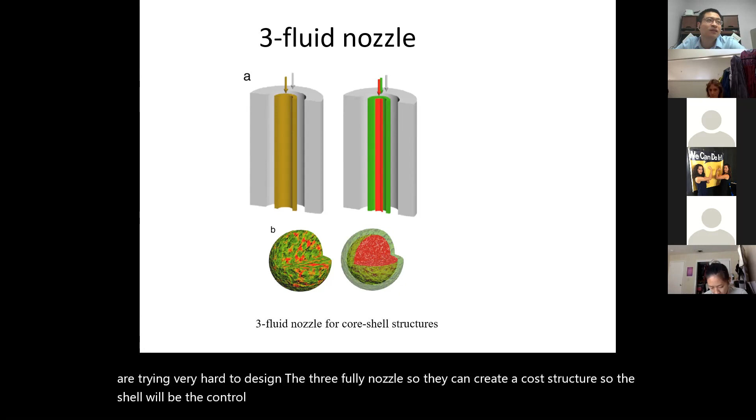Because that's where they are absorbed. So that's why these companies are trying very hard to design the three-fluid nozzle so they can create a core-shell structure, where the shell is the controlled-release raw material to help our targeted delivery tasks.

But if we use a very conventional two-fluid nozzle, then the product we're producing is kind of a mixture of the raw material and the core material. Is that clear, guys? Okay, so this is one of the trends of the industry in the spray drying field.

So these are comparisons of particle size made by different nozzles. If you look at the rotary wheel nozzle, on the very left, you can see the particle size distribution is very wide, from 1 micron to 600 micron. That's because the rotary wheel is not distributing those droplets very evenly into the drying chamber.

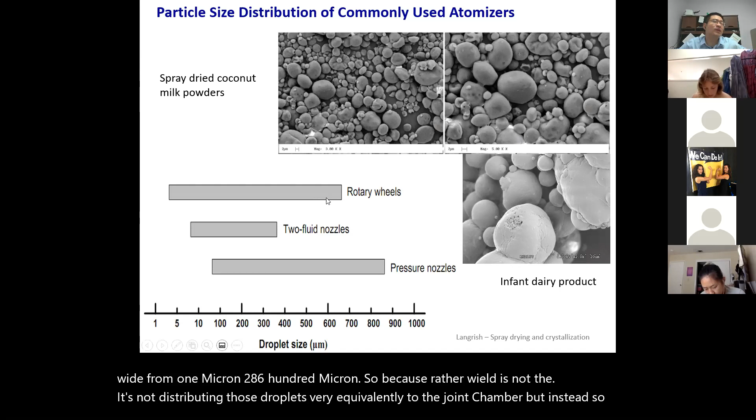So that's why you see a big variety of droplet size. In spray dried products, droplet size actually plays a very critical role. For example, if you think about a powder product, if the particle size is too small, what will happen? You guys think, if you have a very, very tiny particle size?

So think about it, if you have very tiny powders, they tend to be blown away by the air. They kind of flow in the air, and for example, when you open an infant formula tank, all the powder just escapes into the room, which is sometimes not good.

And on the other hand, if we have the particle size very large, what will happen? Any thoughts?

Possibly the middle won't get dry and it won't rehydrate, if that's what you're trying to do with it. Yes, yes, good job, Abby.

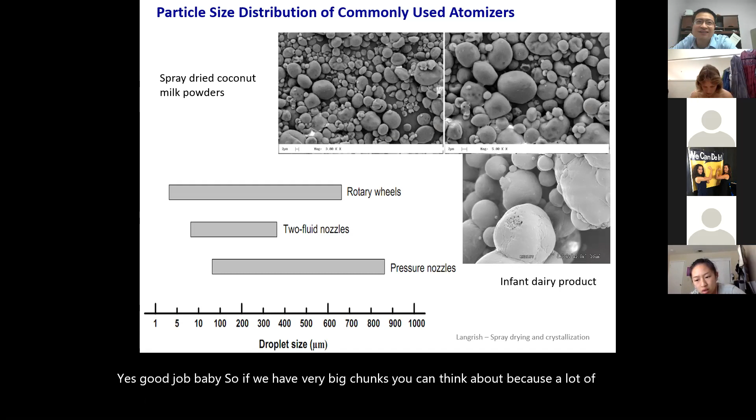So if we have very big chunks, think about it, because a lot of spray dry foods we're trying to make instant coffees or instant soluble infant formulas. Assume we have to take 5 minutes to try to stir our instant coffee to make it completely soluble. That's probably not a good product, right?

So neither small particle nor large particle will be good in this case. We want to control or confine our droplet size or particle size into a very small range, where the particle can be free moving, but on the other hand, not too big to take a long time to dissolve.

So from this figure, you can see that the two-fluid nozzle is much better than the rotary wheel nozzle and the pressure nozzle in terms of controlling the size range. Okay.

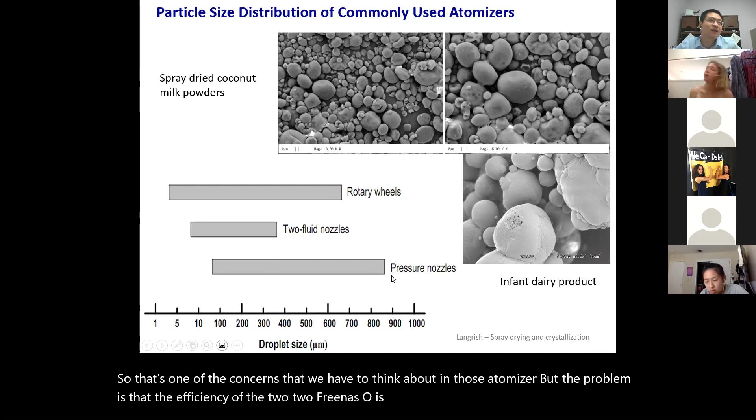That's one of the concerns we have to think about with those atomizers. But the problem is that the efficiency of the two-fluid nozzle is not as good as the pressure nozzle, because by supplying more air, we are actually accelerating the drying process.

So the airflow, let me see if we have time. I'll quickly finish here because we covered quite a lot of content in this lecture. Just like in the heat exchanger, we have different ways of supplying air and mixing it with the food product. We have the co-current flow, counter-current flow, and the mixed flow.

In the co-current flow, the air is supplied from the same spot as the food product, and they flow in the same direction. In the counter-current flow, we supply the air from the bottom of the chamber. And mixed flow is more like a vertical, perpendicular mixing. So those are the three ways, and sometimes it's hard to determine which one's better than the other.

Also, once the system is already set up, it's hard for us to reprocess food with a different airflow, because the air inlet has been fixed in a certain location. So before we design a food system, we need to use something called a simulation tool to predict, in this chamber geometry, which airflow rate and which airflow direction is more optimal.

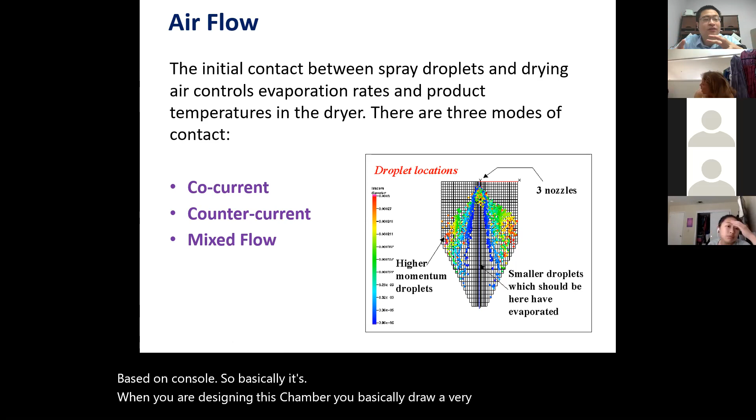This figure is created by a simulation tool. A lot of cases we use partial differential equations based on COMSOL. So basically, when designing this chamber, you draw a very nice geometry that almost mimics the real world chamber.

Then we apply some air condition on the top, and also food product condition, and input the air condition. By adjusting those parameters, we can easily get a distribution of moisture content, particle size distribution, and also temperature distribution in the chamber. So this is sometimes how we use simulation to optimize this spray drying system.

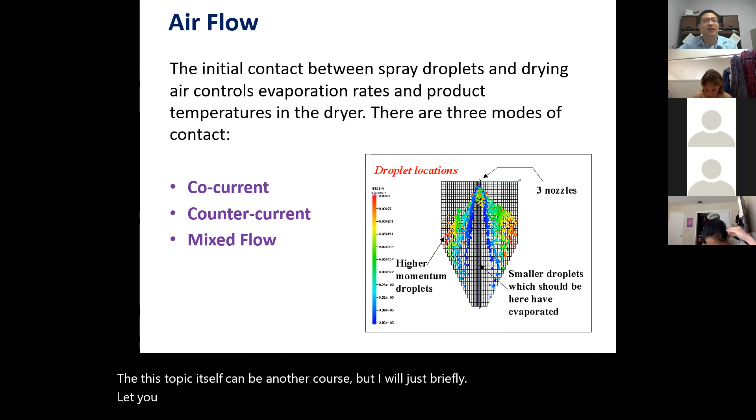If you guys are interested in this topic, I can introduce more about how the simulation tool helps us better design a food process. But I guess this class won't allow me to fully teach you how to use this tool, because this topic itself can be another course. I will just briefly let you know how the simulation helps us better design the system, and also how to interpret those heat maps, and based on those results, how we can adjust our parameters.

For example, one practical application: if we are drying food in different air temperatures and weather conditions, and we don't have an air dehumidifier, how can we adjust our heating temperature and airflow rate to reach the same product quality in daily production? That's one practical application.

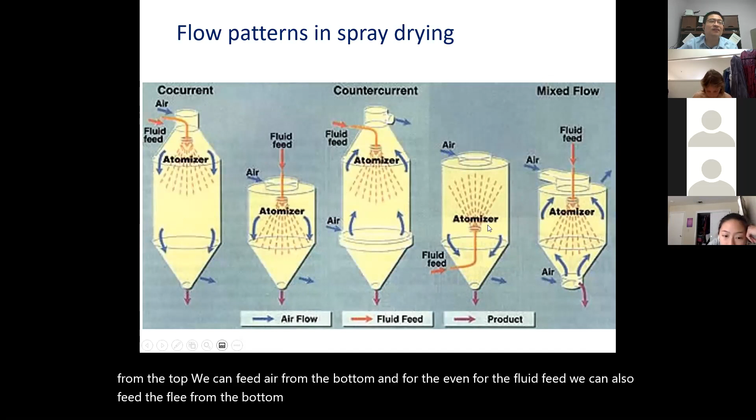So those are all the different flow patterns. Just like airflow, we can feed the air from the top or from the bottom, and even for the fluid feed, we can also feed the fluid from the bottom. It really depends on which one is more efficient and what the food property looks like.

All those different designs, we cannot say which one is better than the other, because everything depends on how well the system works. That's why sometimes we also use simulation, a lot of cases with COMSOL, to determine which geometry design or flow pattern, where we place the fluid, will be the best case scenario.

I'm going to skip all this. Those are all different designs of the spray dryer, because we are running out of time, and if you guys look at the slides, you'll be able to get it.